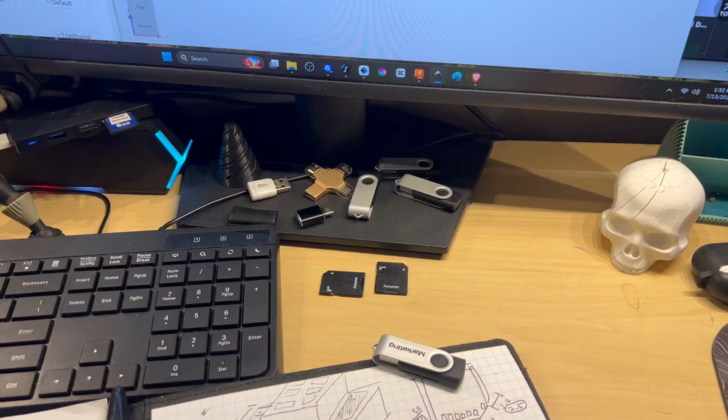It's a constant battle keeping track of my USB drives, SD cards, and micro SD cards. So instead of letting them float around my desk and fall behind it, I'm going to make a little storage block.

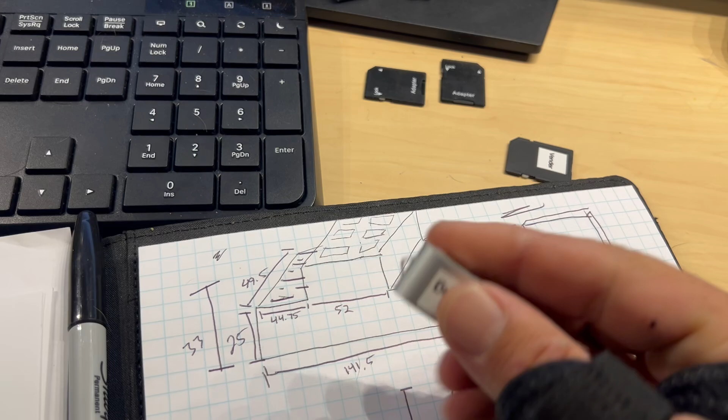So the way I'm envisioning this is three separate areas. One will be for USB drives that stick in, one will just be an open bin cubby area, and the other side will have slots that your card will slide into.

This is what the top view is going to look like. I took a bunch of measurements. Kind of looks the same, right? So we'll see if my measurements are correct.

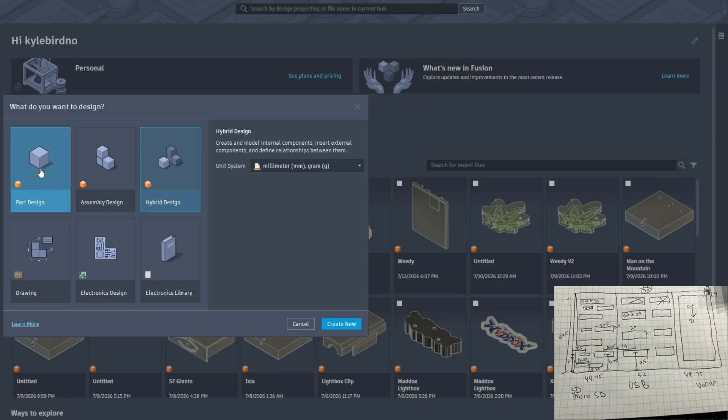And voila, we are in Fusion 360. Okay, it doesn't really matter, we're just going to do this as a part design. It's just going to be one piece.

It's a simple design. First thing we're going to do is start with a sketch, starting on the base—this is like starting on our build plate if we're looking at the 3D printer.

Let's get back to home. Now, down on the right, you can see the sketch that I made. Our dimensions are 49 and a half wide by 141 and a half long.

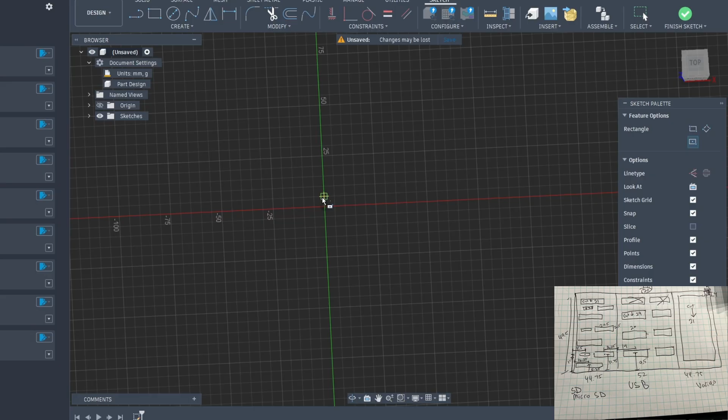So we want to start right on the center. Let's go 49.5, and this is going to be 141.5.

Okay. I don't like the cross construction pieces, so we need to divide this into three pieces.

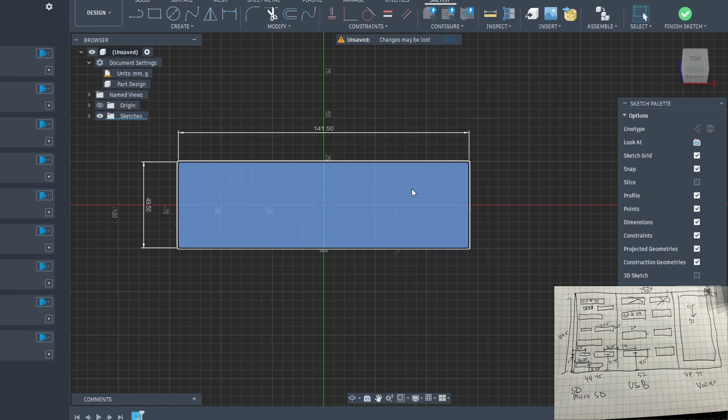Actually, let's go ahead and extrude this. We know on each of the sides, the height is 25 millimeters, so our minimum height across the whole thing is 25 millimeters. Let's just go ahead and take this up 25 millimeters.

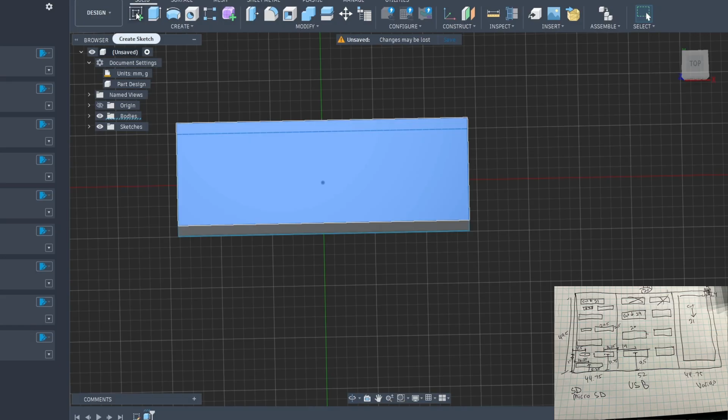Let's go ahead and start a new sketch on the top here. Now, looking down at our sketch in the bottom corner, each side is going to be 44.75 millimeters—44.75 on the left, 44.75 on the right, and then 52 is the remainder in the middle.

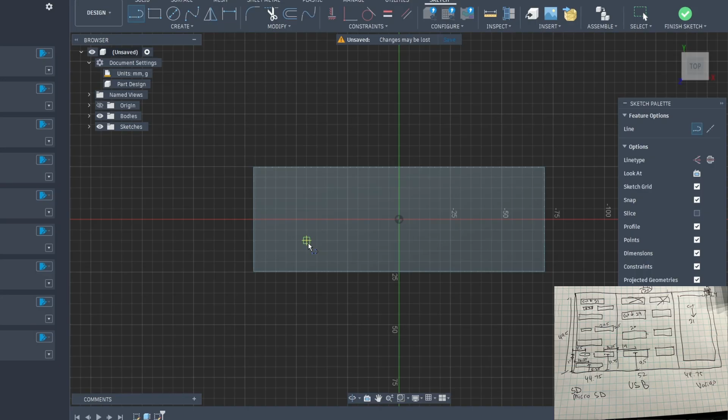So we're just going to draw a couple lines, and then we can dimension them after. So, one and two. Now all we need to do to dimension, you can do it up here or hit D.

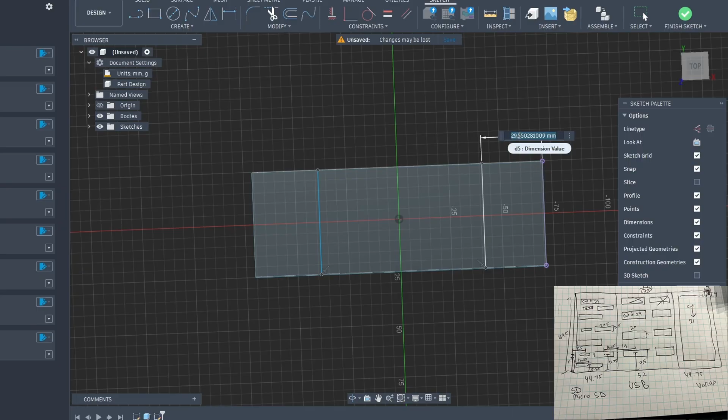We're going to choose this line and this line because we want that distance specifically to be 44.75, and then do the same thing over here on the left, 44.75.

If we just want to measure, up here on inspect, we can take our measure tool, and we've got 52 for our middle.

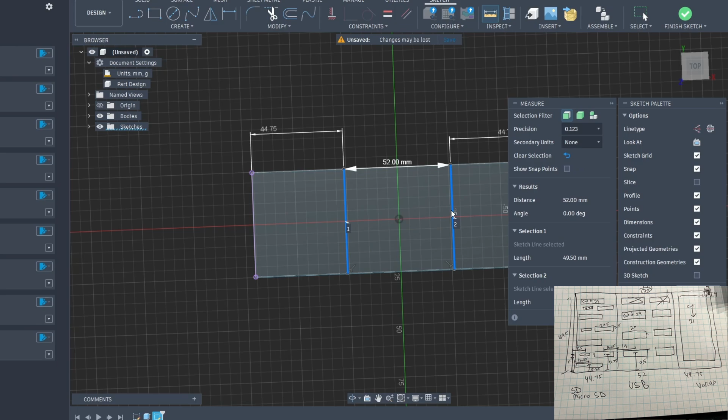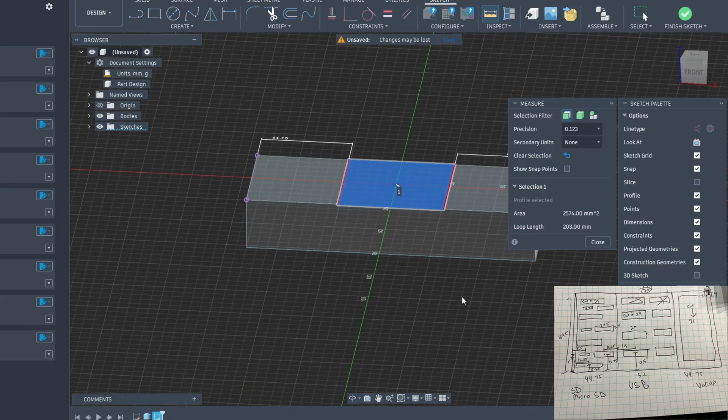Now that middle section—this doesn't show it, the side view shows—we want to go up to 33 total. So we've got 25, we want to take this up an additional 8. So we're going to do another extrude on that, and that's going to go up 8 millimeters.

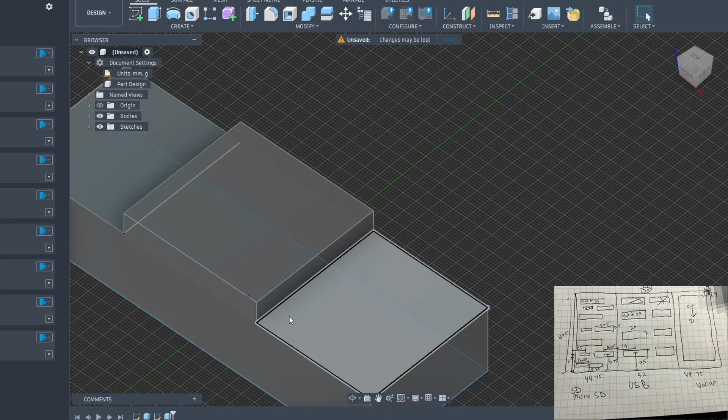Let's start with the easy one first. We're going to do a 4 millimeter border on this, and then take it all the way down 4 millimeters from the bottom, so it's got a 4 millimeter shell on all sides.

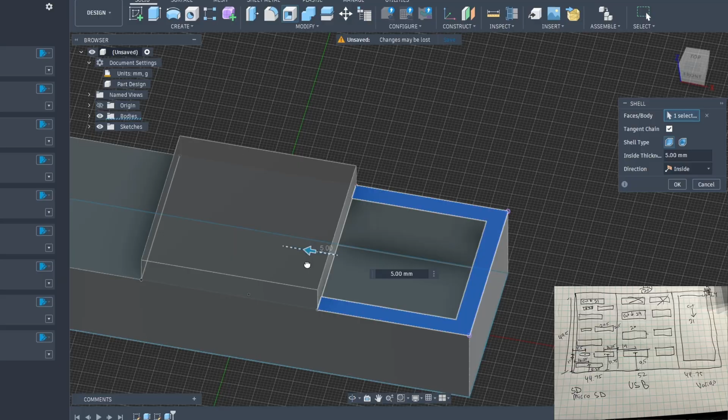The shell function is not going to work here—it tries to take it in that way. We don't want to do that because it's looking at the whole face underneath as well. So let's get out of that.

So what I'm going to do instead is just make a couple of points, and we're going to make a 2-point rectangle. So I just drew 2 points.

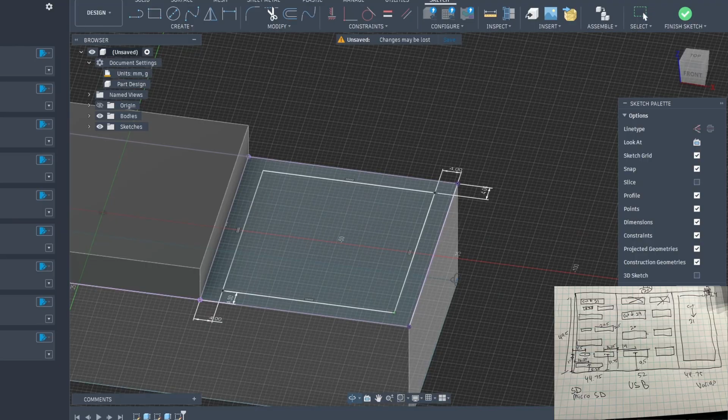We want 4 millimeters, 4 millimeters, same with this one. Okay, we got our 2 points, it's 4 millimeters offset, and just like that.

Now we'll take that and extrude. See how right now it's pointing up? If we put in a positive number, it's going to make this go up. So what did I say?

Our total height is 25. We want 4 on the bottom, so that's 21. If we just type 21, it's going to go up, so we want a negative 21.

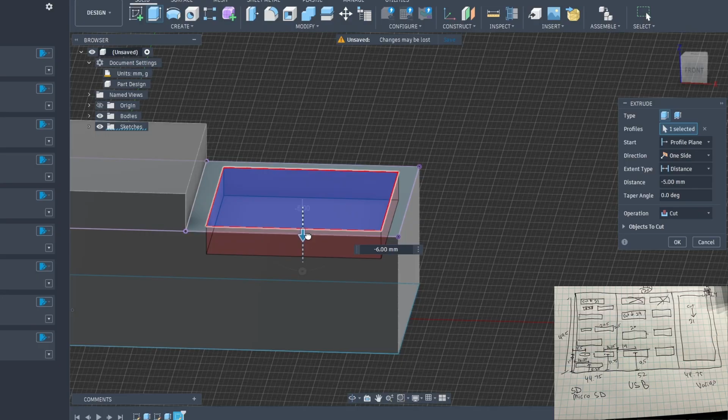The other thing you can do is just grab this little arrow and take it down until you hit 21. Let's go ahead and finish that, and now we've got a little cubby.

Okay, let's work on our top. Looking down at our sketch, I crossed out one of those rows—this is going to be 3 by 2.

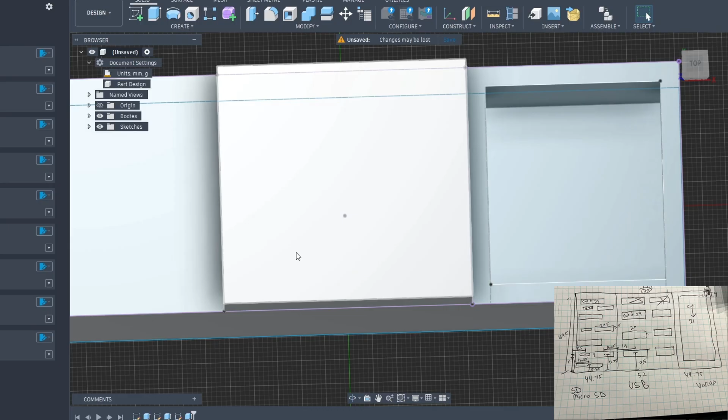Each of our slots to fit our USB drive is going to be 20 long by 11 wide. We're going to have 3 going this way and 2 across, so 2 rows of 3. All we need to do is create the first one, and then we're just going to make a pattern and fill it in.

Down in that bottom left rectangle, you can see I put a center point in there and then put some dimensions of 14 away from the side, and then 9.5. That's our center point for that first rectangle.

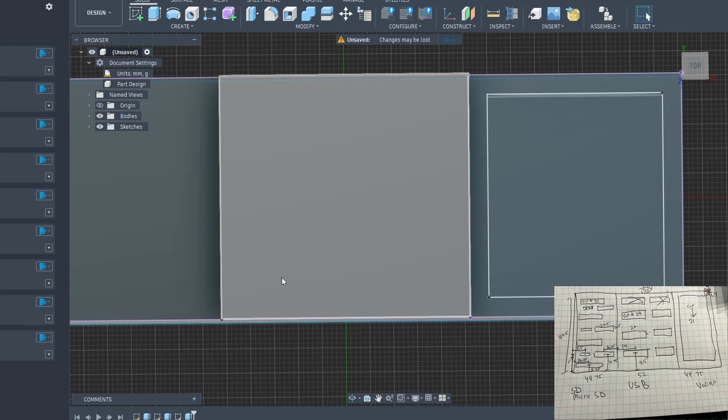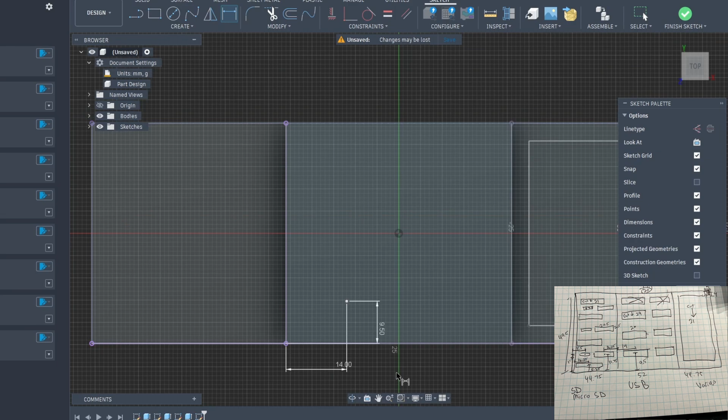So let's go ahead and get a sketch on that top plane, and we're just going to make one point for now, and then we will dimension it. So D for dimension, we wanted this 9.5, and this one is going to be 14. Okay, that is the center of our first rectangle.

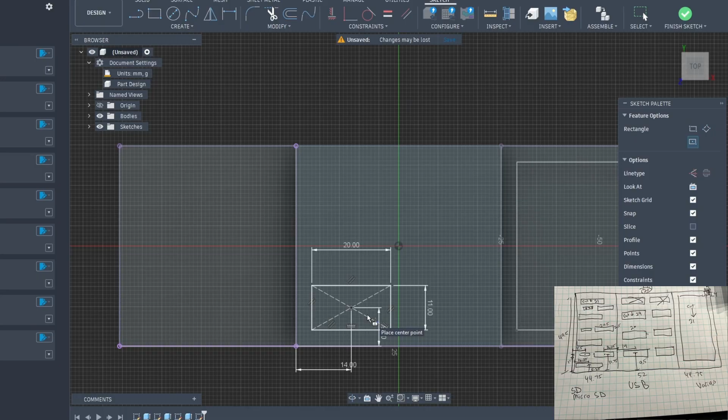So now we just take our center point, do our rectangle, 2-point rectangle over on the sketch palette on the right, select center point. We're just going to type it in. These are 11 by 20.

First thing I want to do is extrude this because we're going to make a pattern, but we're going to make a pattern of the feature. So let's go ahead and extrude this. We want to go all the way. Same thing, leave 4 millimeters on the bottom.

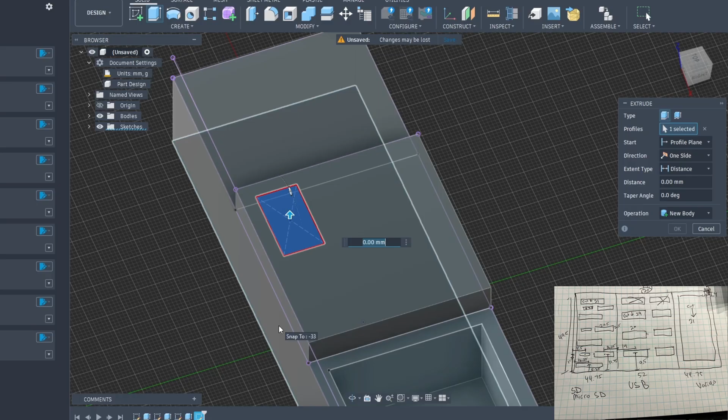So the total length of the USB drive was 58 millimeters. I was planning on doing half, but yeah, so that actually does take us to half. So 29, if we take this down 29, because this was 33 tall, that leaves us our 4 millimeters on the bottom.

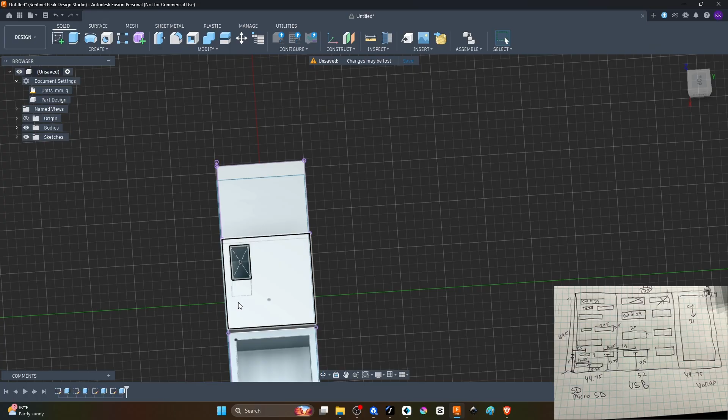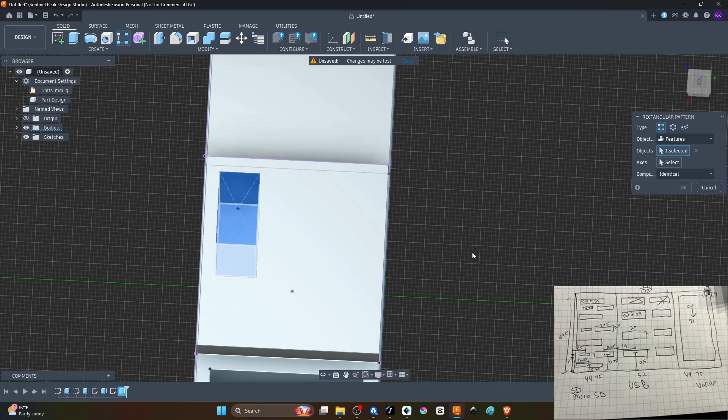Okay, let's go ahead and do our pattern. So up here, the solid tabs on create, you got rectangular pattern. We don't want to do bodies, we want to do a feature. Now we can select our actual extrude feature from the timeline down here, and we can make our pattern on this. So I selected our feature. You can see it's highlighted blue now. Now I need to select our axis.

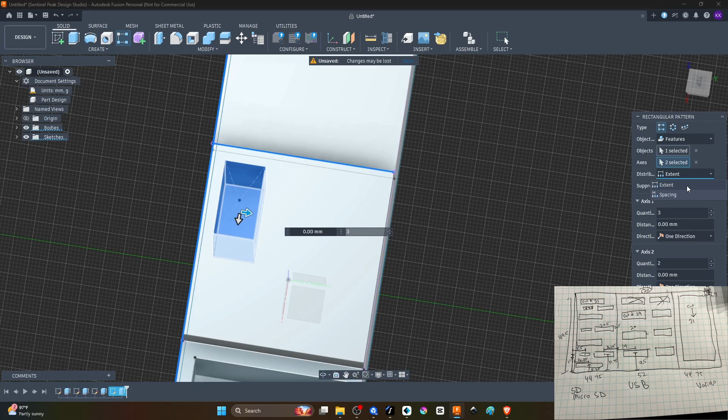We're going to have 2. We're going to go on this one, and we're going to go on this one. So I'm going to put in on axis 1, we're going to have a total of 3. Axis 2, we're going to have 2. Distribution, we want spacing. And let's drag it across. So now we have all 6 of our holes.

And we are done with that part. So here, if you look down at the bottom right, you'll see we've got 2 rows alternating, kind of zigzagging, of the SD card, the larger hole. And then we've only got 3 along the left side of the smaller, the micro SD cards. We've only got 3 of those slots just kind of filling in holes over there.

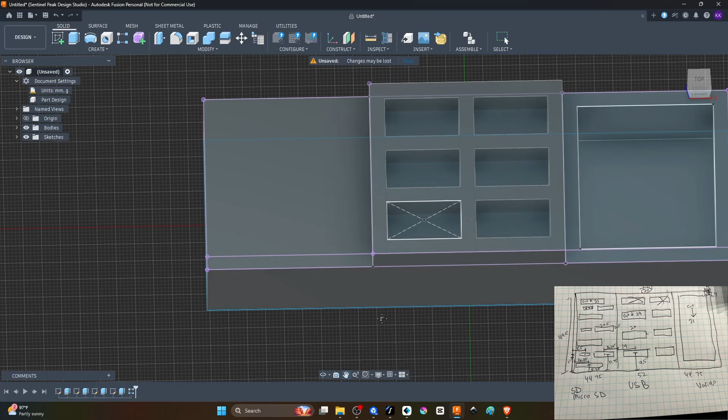So let's start with our sketch, as usual. And why does it not want me to sketch there? There we go. Okay, so I did the same thing here and marked some center points.

This one, we're going to actually have 3 patterns that we need to do. So that first left row of 4 of the SD cards, that's going to be one pattern. You can see the bottom one, I put the center point, 5.25 off the bottom, 16.25 off the left. And then the right side, our first point is 11.75 off the bottom and 16.25 off the right. For our micro SD card starting point, that's going to be 11.75 off the bottom and 8.5 off the left.

So I'm just going to put 3 points, and then we're going to dimension. Not mirror. Okay, so this first one we said was 5.25 and 16.25. That's going to be the center of our first rectangle for this row.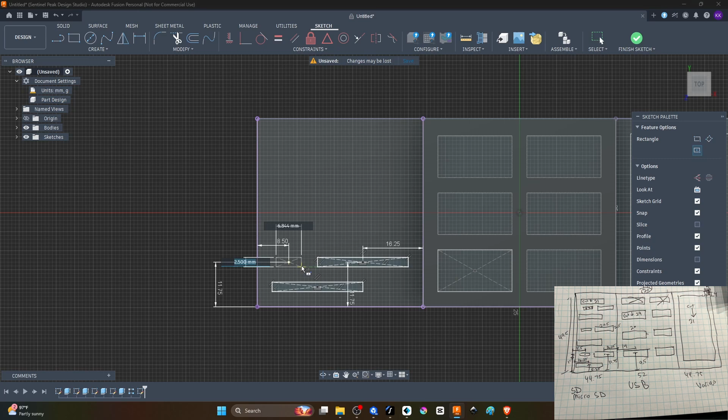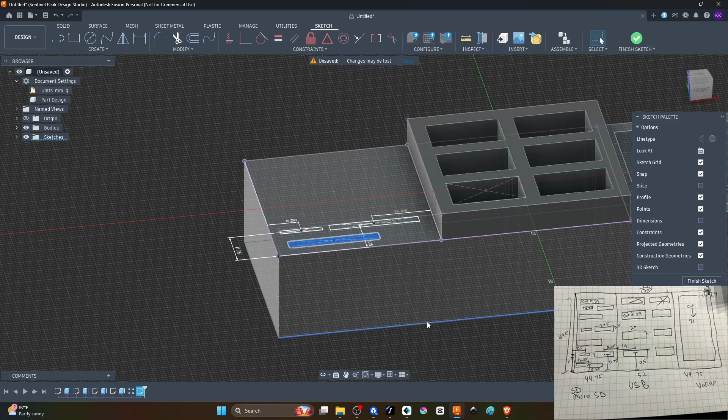We want to do each extrude separately. These 2 are going the same distance. This is 25. We want to leave 4 on the bottom, so that's going to be 21. But we want to do them separate because we're going to pattern on the feature, and we need each extrude to be its own feature.

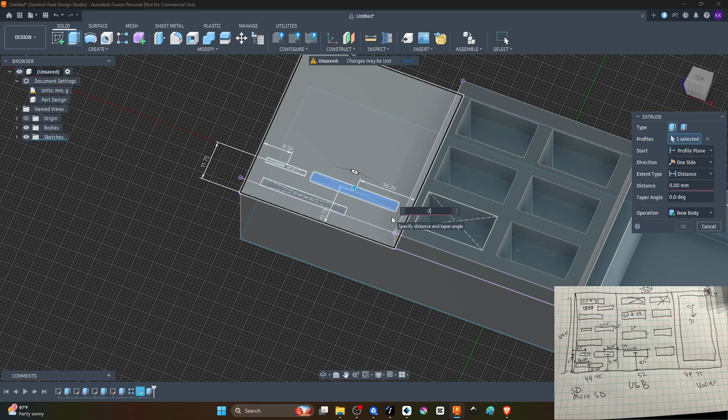So let's start with this one, minus 21. E for extrude, minus 21. And the small one, this one's only going down 7.5. That's going down half of it.

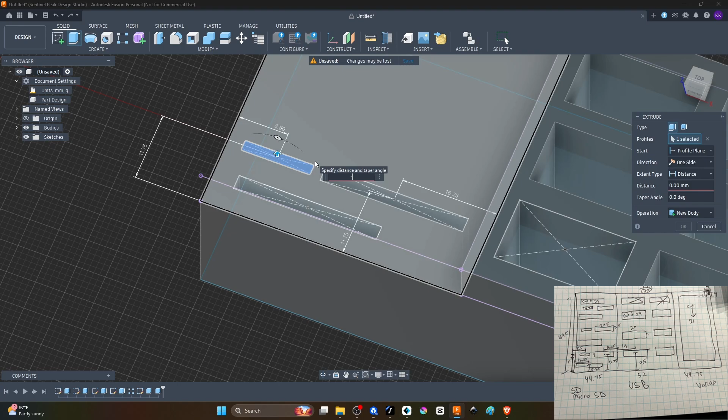And I did not do the negative. See, that's what happens. All right.

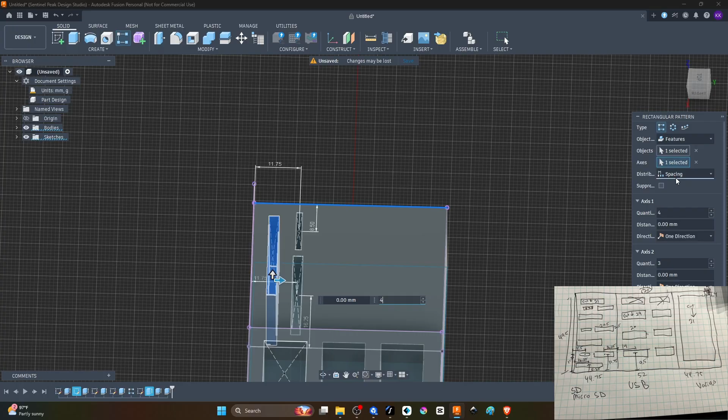Let's pattern. Again, we're going to select our feature, which is the extrude down here on the timeline. Our axis, this time we're just selecting one, we're just doing this one row. We want 4, and it stayed on spacing, so we're going to go until they are all even.

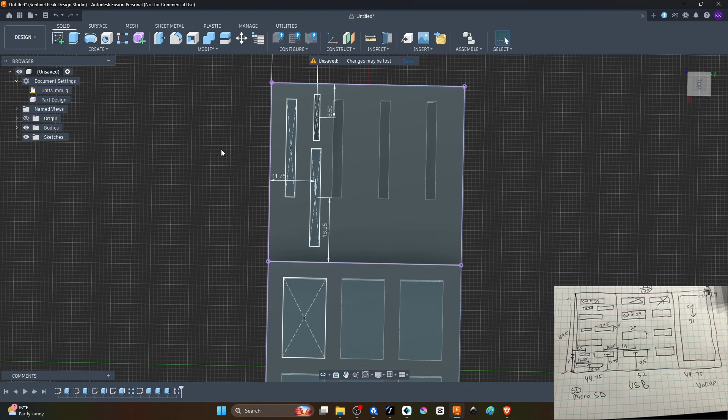Okay, same thing again. Let's go ahead and hide that sketch, we don't need it anymore. So this is our second extrude. Our axis again is the top. It's wanting to go the opposite direction. We're doing 3. We're going to force it that way. So it made a negative on its own.

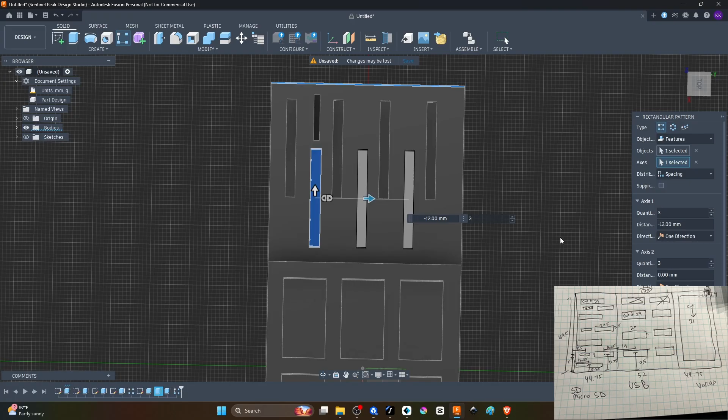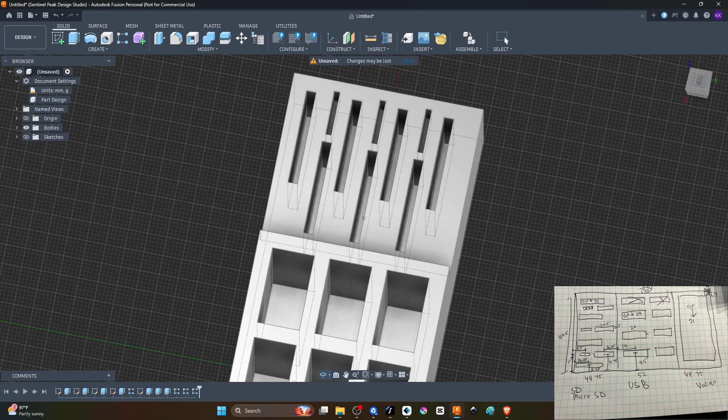Last one is our micro SD card, and then we'll do some cleanup. Our feature is that last extrude, axis top. This one we want 3, and drag it out. And look at that.

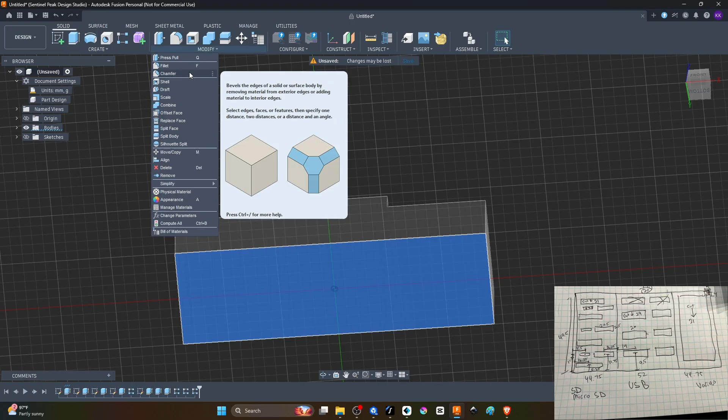Now let's clean it up. Looks a little blocky, doesn't look very good. So let's add some fillets. I'm going to do each of the 4 sides here. I'm just going to highlight, select the whole bottom. We're going to do chamfers, not fillets.

So let's see what one looks like. Let's get crazy, I'm going to double click that just to edit it, and we are going to change that to 3. Now it looks like a boat.

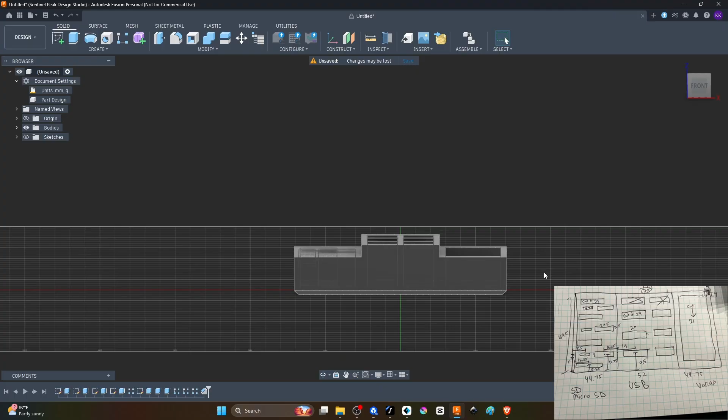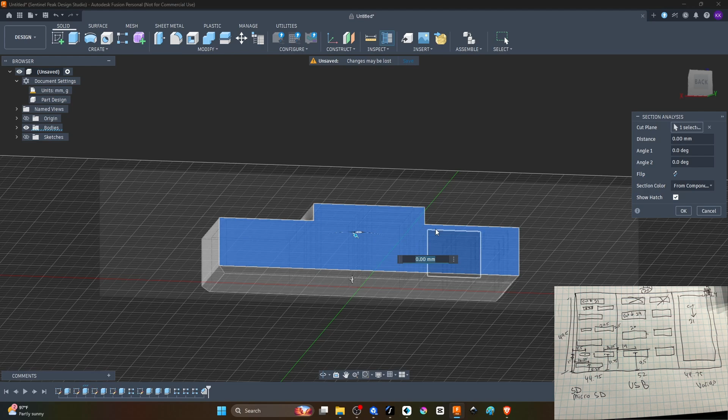Let's take a cross section. We're gonna look at this just to make sure we didn't chop off too much there. I just wanted to look at this corner, make sure doing that 3 on the chamfer didn't take it too close. So we are safe.

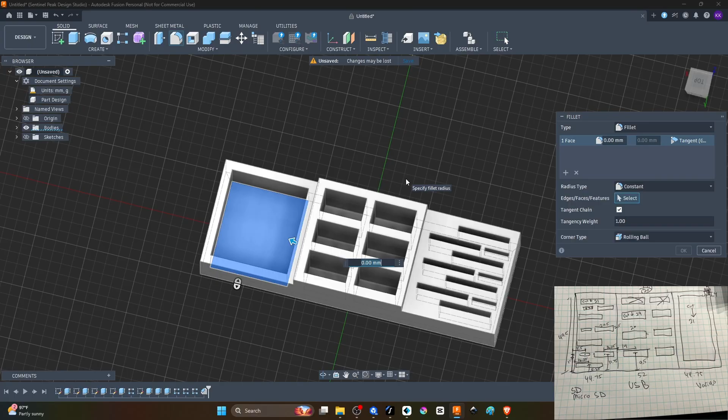Let's get out of there. In the bottom here, I want to do these rounded, so we're going to do a fillet in there. F for fillet. That way, if something gets down there, it's rounded and you can reach in with your fingers and scoop it out.

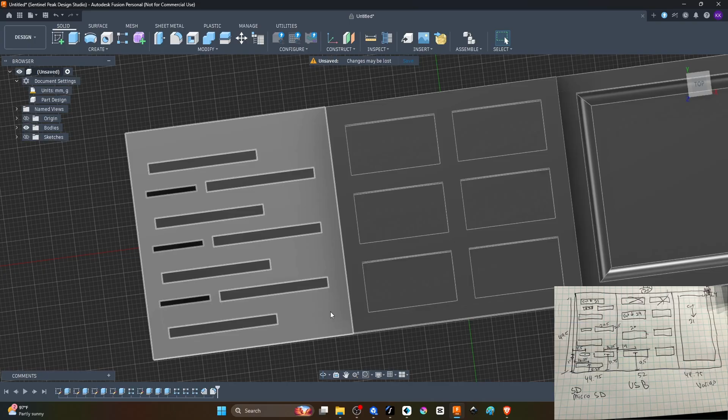I'm not worried about the bottoms of these guys, nothing, you're not putting your fingers in there. But I do want to clean up the edges. I don't want to select the whole... do I want to do the whole top? Let's see how it looks. We're doing the chamfer.

Let's look at 0.8. Some of those holes are kind of close together. All right, that looks good. Last, let's get all these corners.

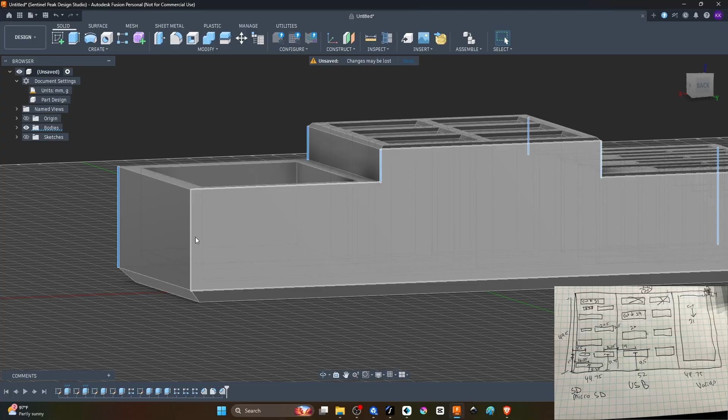Little chamfers on those slots that'll help the SD cards and USB drives go in a little bit easier. Chamfer, and 0.8. Okay.

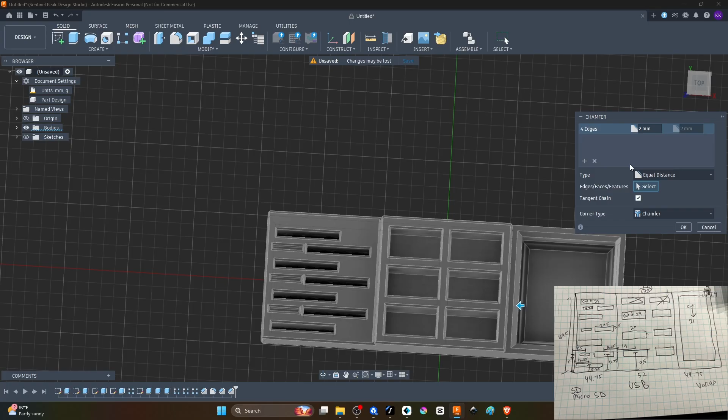Oh, last one, I want to get around here with the chamfer. This one I can do a little more. Let's go 2. Yeah, let's get crazy. All right, and we're done.

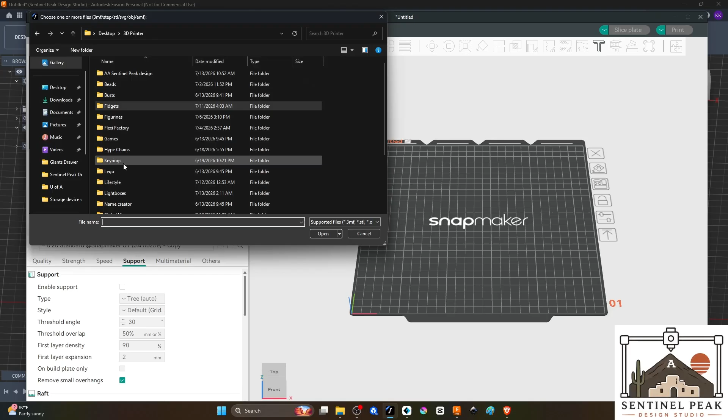Okay, we are in Snorka, which is the Snapmaker branch of Orca Slicer. So let's just get this thing loaded up real quick. And that is our storage. We can call it storage. Storage for your storage. Let's slice it up, I'm going to see what our settings are.

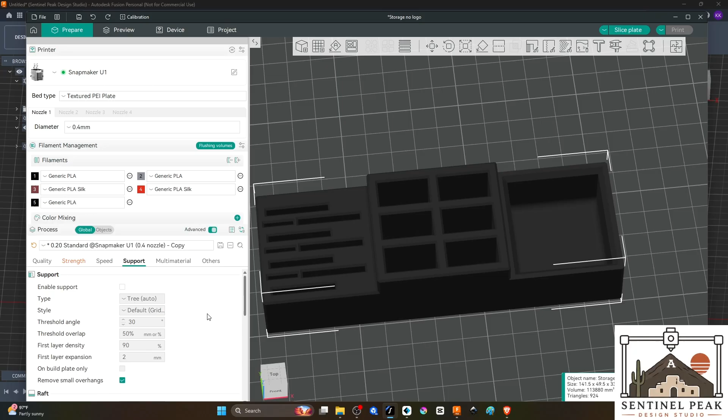Quality, 0.2 layer height, we don't need anything crazy. No supports, no brim, slice and dice. Hour and 50 minutes.

And it's done, look at that. My storage devices aren't total chaos anymore. So I've got all my SD cards, adapters, micro SD card. Those fit in nicely, and then all my adapters for the micro SD cards.

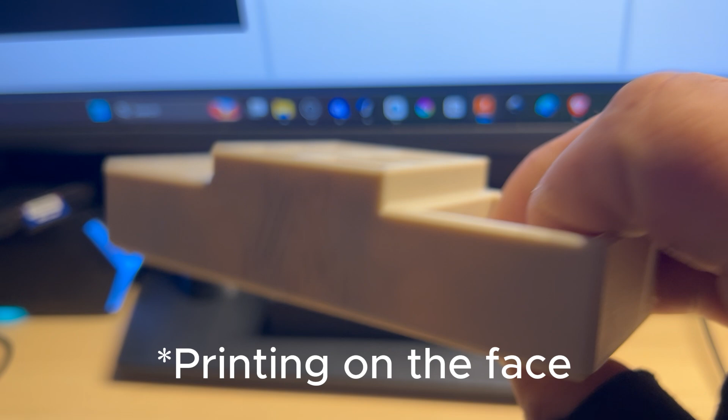I also printed another version with the Arizona A on it. I only had it come out, I think, a half a millimeter, and it was printing on the face, so it has a hard time doing that kind of extrusion.

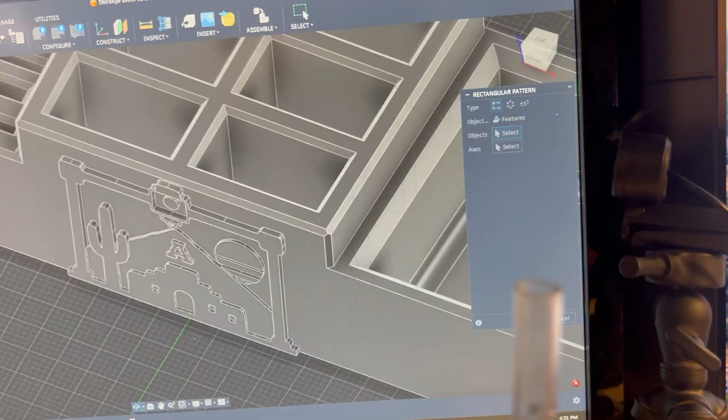I am trying doing another one with my Sentinel Peak logo on it. This one I'm trying to do, we'll see, because it's going to be kind of small. I don't know if this is going to work. I'm trying to do it kind of layered. We'll see, I think that would look cool on a bigger design where you can actually see it.

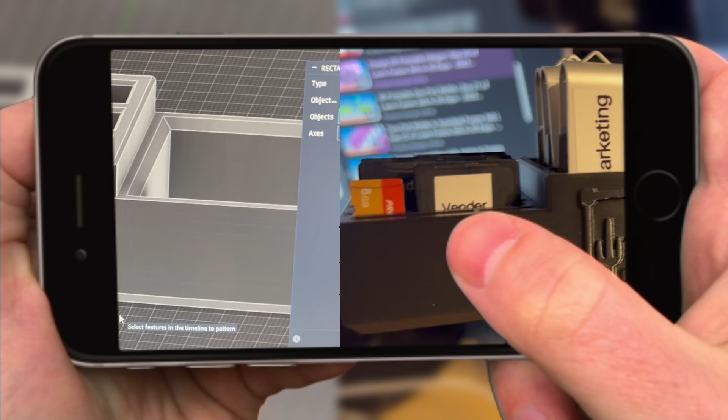All right, I'm back one more time. I printed it for a third time. Just wanted to see what it would look like with the logo.

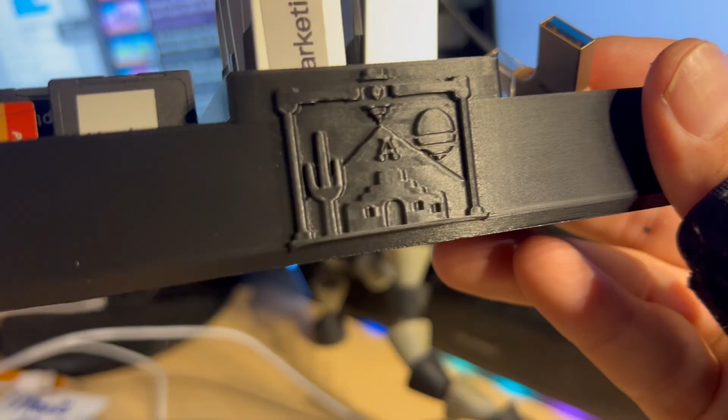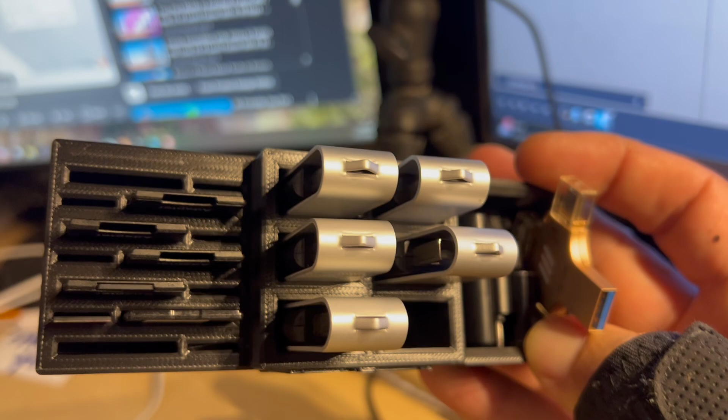I did make it multi kind of dimensional, with the sky being one, and then the mountain being one, and then the A, Saguaro, and the Adobe, that's all in another. So I think it turned out pretty good. I also just filled in the rest of that pattern on the right side with the smaller ones for the micro SD, so it doesn't look odd.